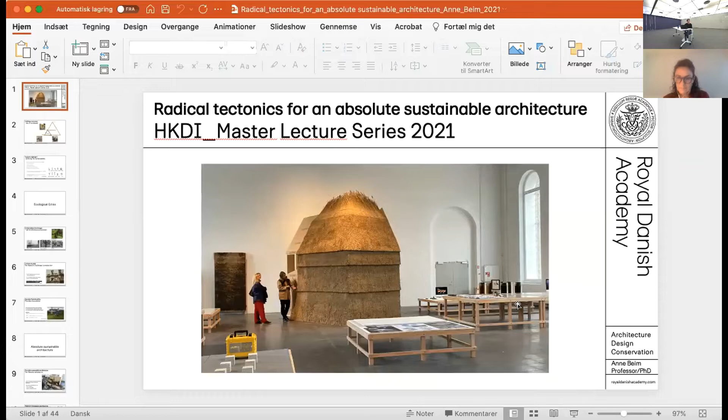But I understand that I'm now going to share my screen. Can you see it? Does it work? Yeah. Very good.

Well, what you see here is from an existing exhibition that is now running at our school. We have a large exhibition hall, and I'm going to return to this later in this lecture. I'm going to speak about what we in our center have been working on for some time, what we call radical tectonics within the framework of absolute sustainability. It seems a little bit extreme in many ways, but actually it's just a way to try to get into the core issues of both tectonics and the aspects of sustainability. And I'll try to unfold this now in this lecture.

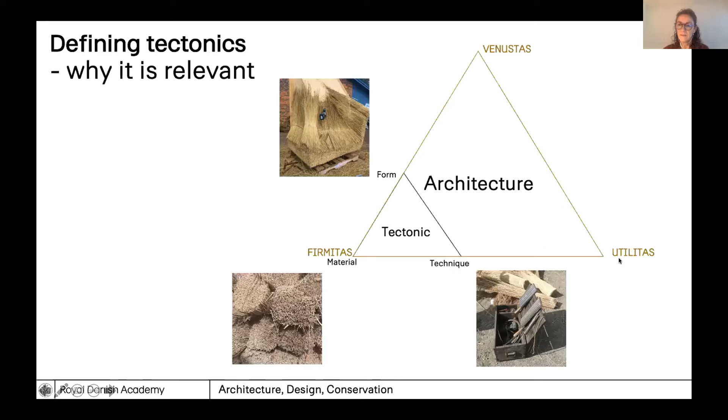But for those of you who are not totally acquainted with the concept of tectonics, I'll just briefly introduce it to you, and you will probably see throughout the lecture why it's relevant. As you may know, the ancient theorist Vitruvius, who wrote the Ten Books of Architecture, one of the first theorists in architecture, defined the three concepts. I have a problem with my local screen here. Anyhow, venustas, utilitas, and firmitas, that is the beauty, the utility or the functionality of buildings, and then the firmness or the technology of the building.

And as such, tectonics is sort of a subcategory of architecture in the larger context. In that sense, we can define it as a smaller triangle that is concerned with the form, the technique, and the materials of which architecture is made. And of course, it taps into the larger aspects of beauty and the use of the building. So in that sense, it's all connected.

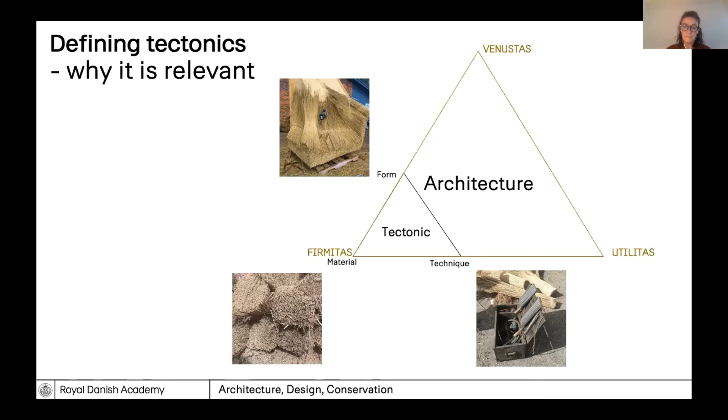Why is this now? One of our colleagues had dug deeper into this concept of tectonics and defined what we now call the tectonic alphabet, which is the different ways by which you can actually work within the tectonic realm. And that is directly connected to building technology, which means the way that the different construction elements or the material connections are related.

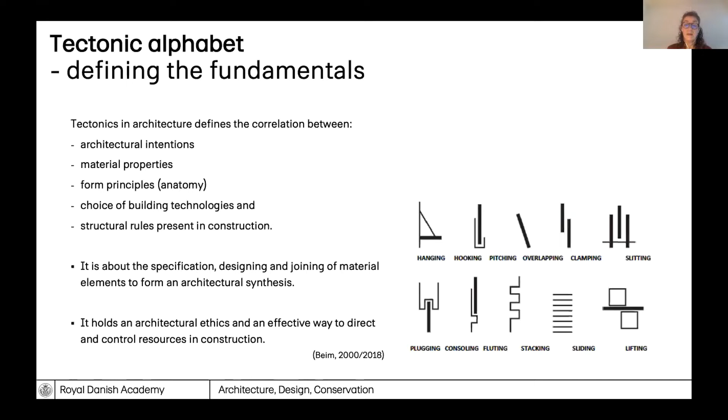So altogether, it's about the specification and designing and joining of materials and the elements to form an architectural synthesis. And in that way, as is said here, it holds an architectural ethics and an effective way to direct and control resources in construction.

However, we are now looking into, at least from what we talk about here in Europe at the moment, the COP, a global issue; we have COP 26 going on right now in Glasgow, and we have different statements coming out from the meetings that it's very serious, and we now at a global level have to find solutions to the present problems, which you could define as an ecological crisis. It's not only a climate crisis, it's an ecological crisis at a larger scale. It also relates to the question of biodiversity, or lack of biodiversity, resource scarcity, and of course the climate crisis we now see in different ways across the globe.

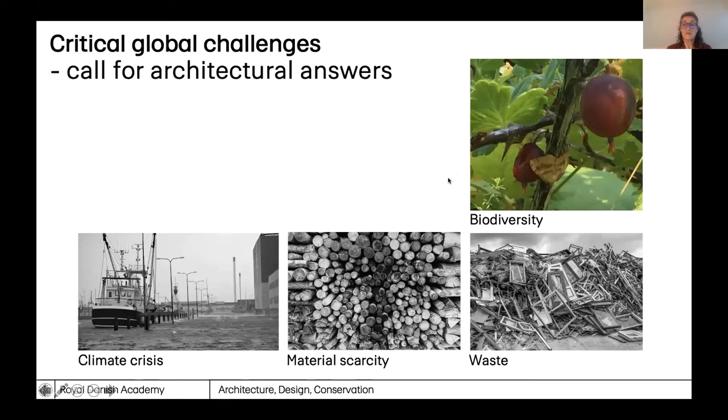And finally, we have problems with waste. Waste from the construction industry is actually a very big problem, but waste at all levels; in particular, we also see the problem of plastic waste. However, these overall questions also call for architectural answers. And why is that? In particular, in the building and construction industry, we have a great responsibility to take part in this discussion and find solutions for societies.

And if we look into the numbers, we are responsible at this moment for 35% of the total energy consumption, and we're also responsible for 40% of the greenhouse gas emissions. Not least, 40% of the total material consumption. And in the EU, the total waste is between 30 and 36%.

At the political level, at least in Denmark, our government has decided that by 2030 we are going to have a reduction of 70% of greenhouse gas emissions. However, that's just following EU politics, in that by 2050 we have to have a 100% reduction, and these are reductions in regard to the emissions we had in 1990.

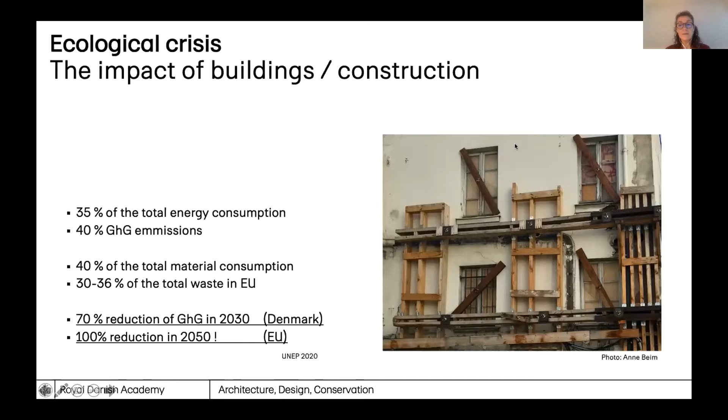When we speak about absolute sustainability, that's part of a larger discussion in terms of the planetary boundaries. This is a research field that has been defined by the Stockholm Institute and one of the main researchers, Rockström, who has defined these different planetary boundaries from 9 primary aspects, also tapping into the critical aspects I was just mentioning, such as biodiversity or pollution of the oceans, the air, and so forth.

However, other researchers have looked into similar aspects for the construction industry. What does it mean when we have to build in terms of absolute environmental sustainability? They looked into single family houses in Denmark. If we have to fulfill these very strict requirements, it will mean that we have to reduce 89% of the harmful environmental effects of construction, 80% of the greenhouse gas emissions from energy consumption, and not least, reduce the living space per person by 60%, which are severe numbers in regard to how we live today.

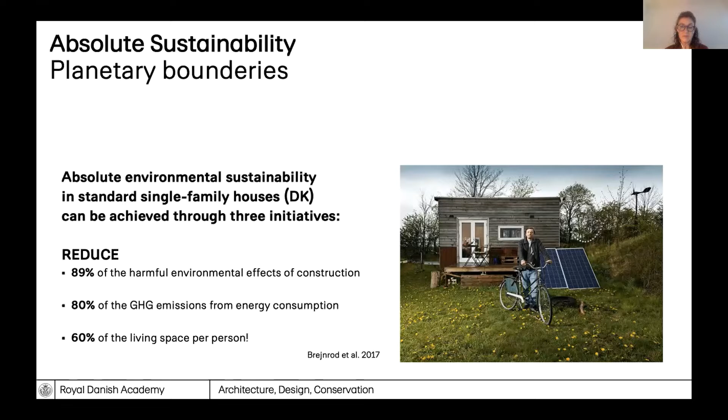So then, of course, that raises the question: are we going to have less living quality, or by which means do we have to reach into these very reduced ways of looking into how we build today and how we're going to build in the future?

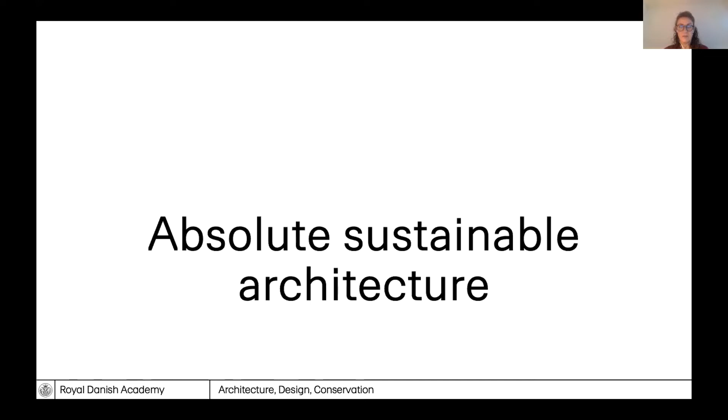So what does this mean when we dig deeper into that question of absolute sustainable architecture? By which means can we build? What sort of architecture do we look into? And from the tectonic aspect, or you could say the material perspective, what sort of materials can we apply?

So we asked ourselves in the research center this question, and we also looked into it from a life cycle perspective, which means that we asked the question, how can we design architecture and build according to absolute sustainable principles? And what would the consequences be for the use of materials, the building techniques, and the tectonics and architecture?

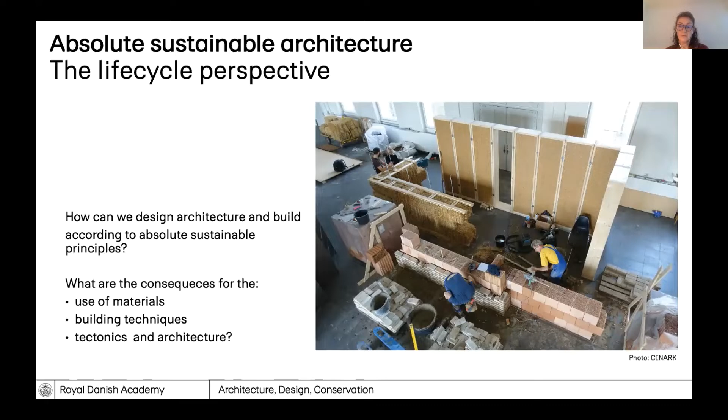Looking into these very severe numbers of reduction, we very quickly realized that it actually left very few materials for us to apply. And we ended up with three main structural materials. That would be straw, wood, and clay.

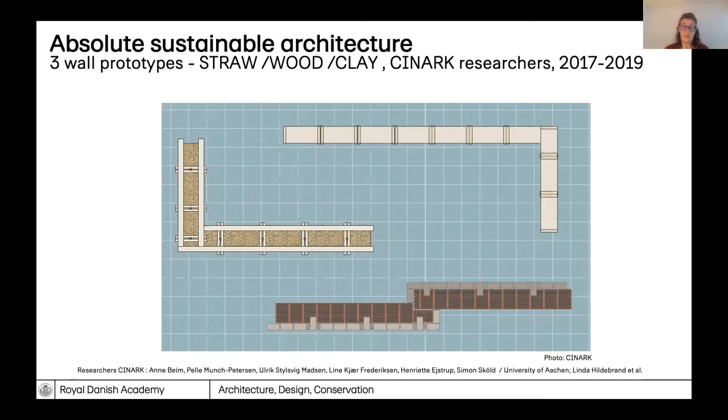However, being the Centre for Industrialised Architecture and having dealt with high-end industrialized analysis and research projects previous to this project, we also knew that we wanted to combine these, you could say, simple materials with high-end industrialized thinking. So we wanted to apply these materials according to the present legislation, and also to the present industrial manufacturing systems and thinking.

But before that, we actually sat down and wrote a manifesto for what we called circular construction within the paradigm of absolute sustainable architecture. It's much longer than this, but I just took the short version: we had to minimize the amount of materials and the number of different materials in the structure. We wanted to use uncontaminated, non-toxic materials that should not be additionally treated. We also wanted to use construction joints or assembly that could be disassembled. And we had to reduce the waste in production.

What does this then mean? It means that we have to leave out materials that demand a great amount of non-renewable energy in the production and/or had severe negative environmental impact. And that is mainly materials made from raw oil and synthetic materials. All together because we had to reduce the damaging effects on the health of humans, animals, and nature per se.

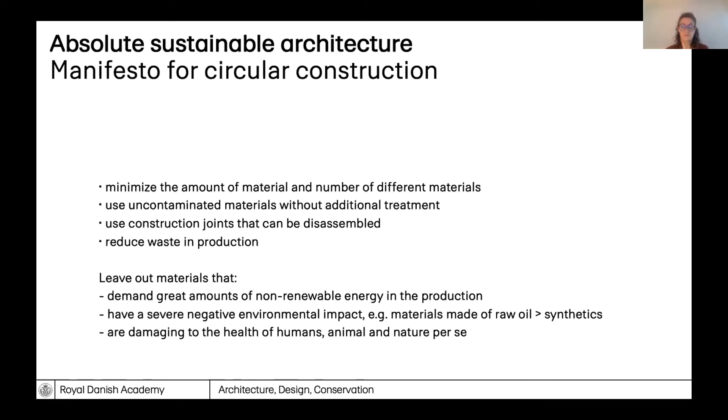In order to get deeper into this, we developed what we call the construction material pyramid, which in this first version is a small diagrammatic system, you could say, that organizes the different materials according to their CO2 emissions.

For this, we could select materials, but also omit materials, as we wanted to lower the emissions. So our primary take on this was actually, you could say, a very narrow focus on the CO2 emissions, at least from the beginning. But that was just a way, a design strategy, in order to get deep into the question of the absolute sustainable solutions.

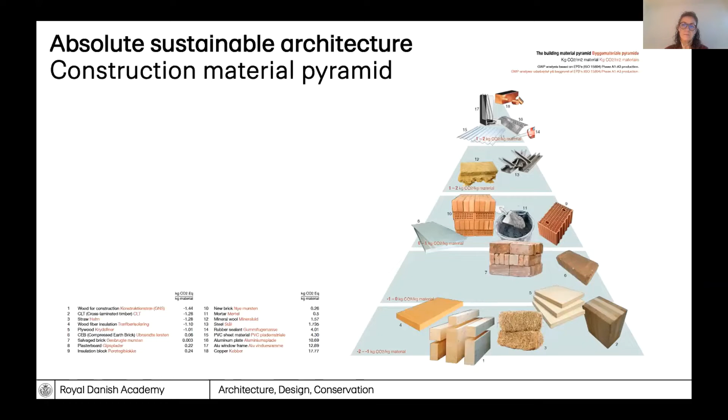So what did we do then? We developed or discussed these strategies for radical tectonics, in which we wanted to use these pure materials. And as I mentioned, we also wanted the dimensions of the different construction elements dictated by industrial standards. And we wanted to have the least possible degree of processing of the materials and components, which meant we wanted to use the raw materials themselves or the components directly coming from industry.

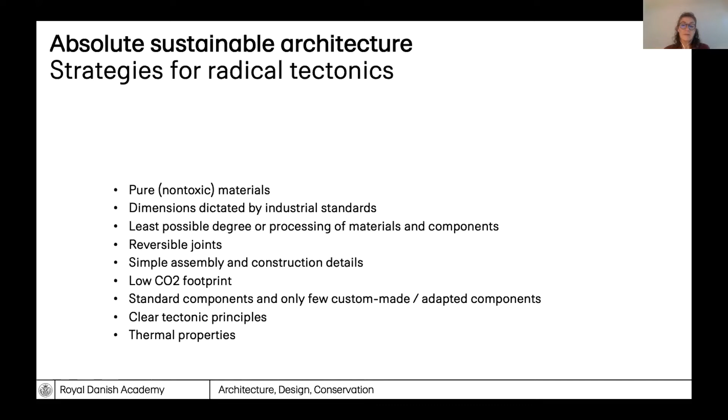And then we had to consider these reversible joints, the way we wanted to construct the various wall elements. So it should be very simple assembly and simple construction details. And then, of course, it was all about this very low CO2 footprint. So, as mentioned, we use these standard components and very few custom-made adapted components or joints. And this was all made from very clear and simple tectonic principles, which were defined in the very beginning.

So what did these radical tectonic experiments turn out to become? We focused on three different material groups, and the first one was wood in this case. So we wanted to make this wood prototype prefab module, based on an industrialized concept. We made it by hand on site in our workshops at our school.

But we tried to apply the procedures and the dimensions of the different elements given by the industry. So there were actually very, very few craft-based procedures. And this could easily be done in a factory or a manufacturing plant.

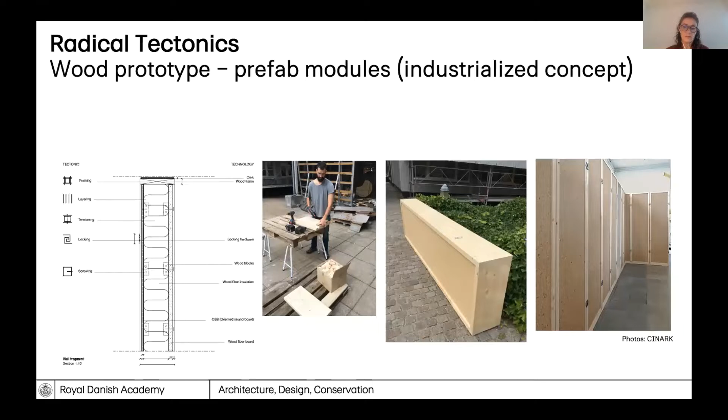What was important was that these elements were joined with this sort of lock that could be locked and unlocked. And what we see between the elements is a cork plate that makes the joint sort of tight and flexible.

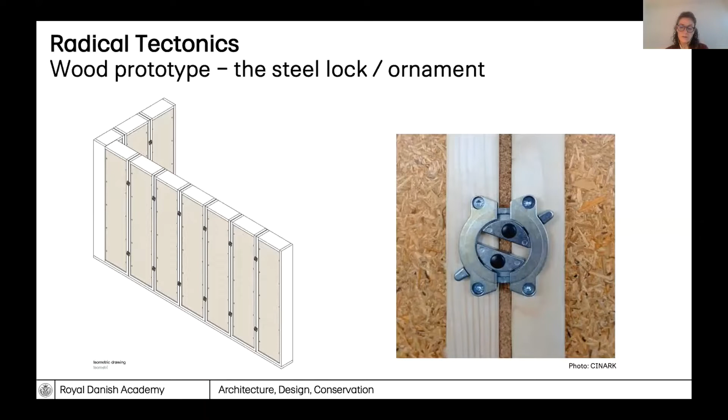So what we're investigating here is actually mimicking the sort of industrialized products or elements, and at the same time pushing the boundaries of this thinking in terms of easy assembly. These elements could be carried by one or two persons and could be put up in a very short amount of time. So we used all the different dimensions of industrialized benefits combined with easy craft procedures.

As for the second structure, that was a combination of unburned clay bricks combined with reused bricks, and for this we built it as a homogeneous wall structure combined with burned tile blocks. This is a very common structural material, particularly in Germany and the larger part of Europe.

It has not been fully implemented in Denmark yet due to our very long tradition of using regular masonry blocks and bricks. However, it's a very highly efficient structural element, and it also has insulating properties. It's easy to build with, and it's also fairly cheap. So it's a highly industrialized product, and we wanted to combine this with virgin materials such as unburned clay, and then the reused bricks.

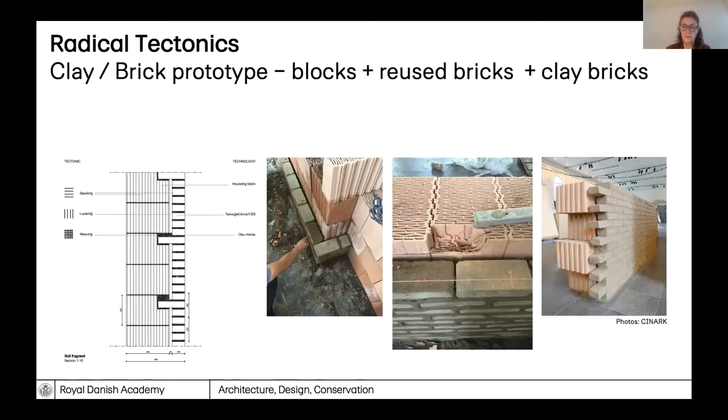So it was a matter of how to combine these various elements in order to also benefit from the different material properties, where the unburned brick was on the inside wall and the reused brick was on the outside. So we came up with what we call a masonry hinge that makes it structurally efficient, and also combines the wall in different ways.

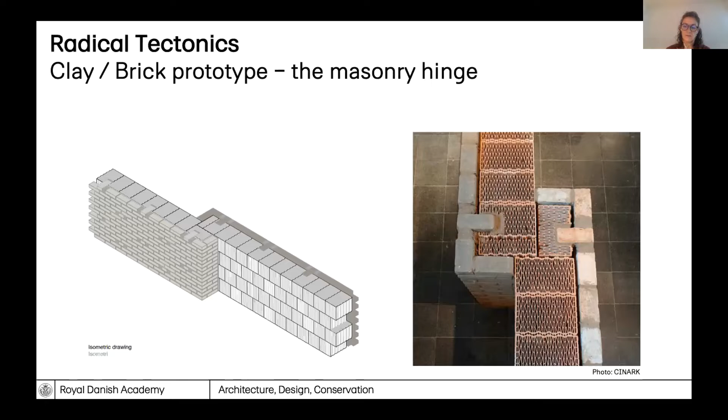Then the last system was applied using straw bales. And actually, while we have been working on this project, which is already a couple of years old, there has now been developed a fully industrialized product called EcoCocoon that is similar to this, a structural element that, similar to our wooden wall, can be built in different sections, but also come as full wall elements. That's a fully industrialized product by now.

So the development in the construction industry is actually speeding up these years. So what we did at our school at this time was actually just the early steps towards an idea of industrializing this sort of construction materials.

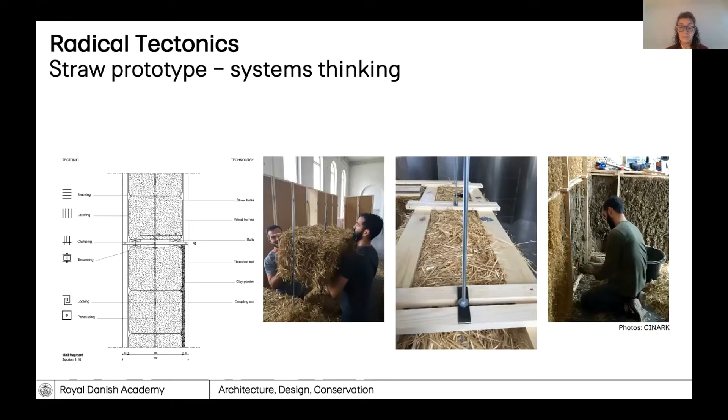And the straw bale, of course, is a very simple waste product from agricultural production, and this is applied together with a wooden frame and steel rods for strengthening the structure. However, it was this open framework that was later cladded with clay plaster, and that is primarily the question of fire protection, which has been an ongoing issue, particularly with the biogenic materials.

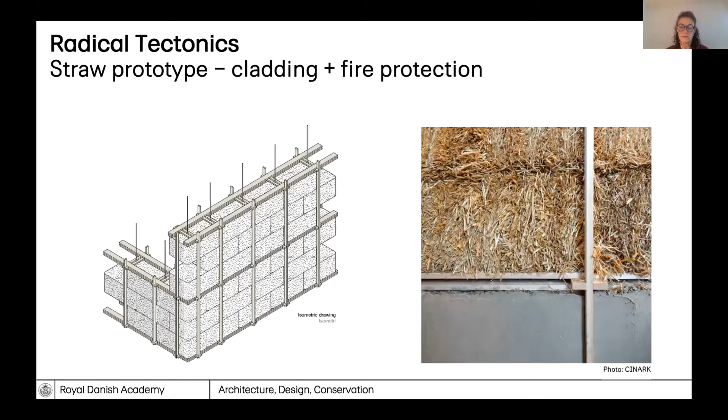So just to wrap up, for these three initial tests or experiments with what we call radical tectonics within the absolute sustainable framework, we wanted to particularly emphasize the question of what we call reversible joints, what we envision as tectonic motifs or ornaments. That also makes it easier to facilitate maintenance, and it's also a more effortless reuse and recycling.

But what is very important is that it separates the life cycle of the building from the life cycle of the materials, which means that you can actually just take out certain parts, but the core structural elements can be replaced depending on when they need to be changed by new materials or altered due to functional aspects.

But altogether, it's also about this ethical awareness when we choose the materials and how it taps into a larger cultural understanding of how we built in various parts of the world. And you could say these three experiments are developed on the shoulders of a deep understanding of the building culture, also within a Danish context, and how it can be developed into industrialized thinking and products.

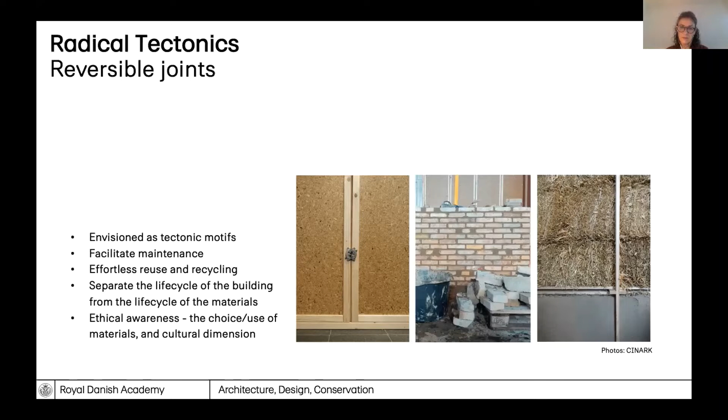So, just very briefly, a quick presentation of the analysis we did on top of these experiments. As you see here, we have the different material spreads, which means that in the different structures we have prioritized the materials very strictly in order to get these very low emissions.

And of course, the one we see in the center is a critical one, because we have the insulating clay block, or brick, that has of course high emissions due to the manufacturing premises.

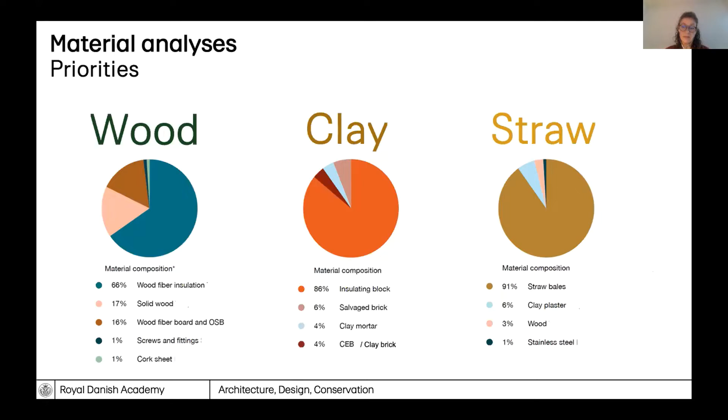It also shows that in the straw diagram we have the straw bales as the main material, and in the wooden one we have the wood fiber insulation, which is not a structural material but the insulating material. So altogether, if we look across the three material types, we see that the insulating aspect is a very central dimension as for the amount of material that is applied.

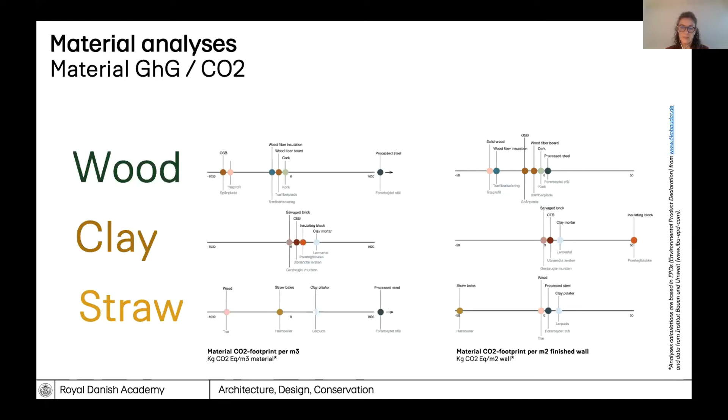So what's interesting when we look at these diagrams is that the different materials move up and down depending on how much material we're actually using in the various structures. So that is very important when we look into these aspects of the CO2 emissions and the impact.

And as for life cycle analysis, we made a very overall estimation of how, within the various time lapses, the different materials either could be replaced or would get into either a technological circular reuse, or a more nature-based or biological circular system.

And when we look at the center one for the clay structure, it of course has a very long-term perspective as for the materials, whereas the straw and the wood have much shorter cycles. However, they are also based on biogenic materials that much more easily can get into the biological

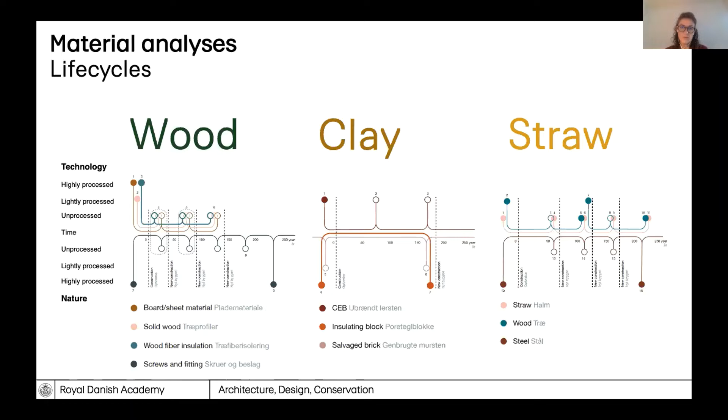ecological systems. So in that sense, these diagrams and these analyses have to be looked at very critically and also studied in detail in order to understand that it has very different impact depending on what sort of material and what sort of biological, ecological cycles they are part of.

And finally, when we look into the overall global warming potential for the three structures, the brick wall, of course, had high emissions, whereas the other two walls had low emissions.

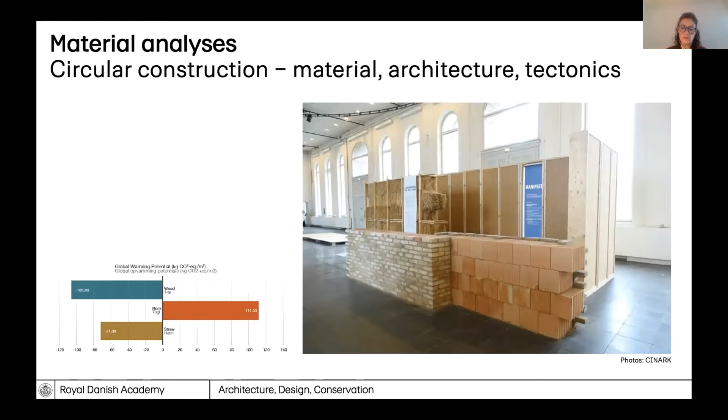And these structures, as you see in here, are just early indications of what sorts of materials, what sort of structures, and what sorts of tectonic strategies we can apply when we look into future use of materials, when we have to get into these high reductions of the CO2 emissions.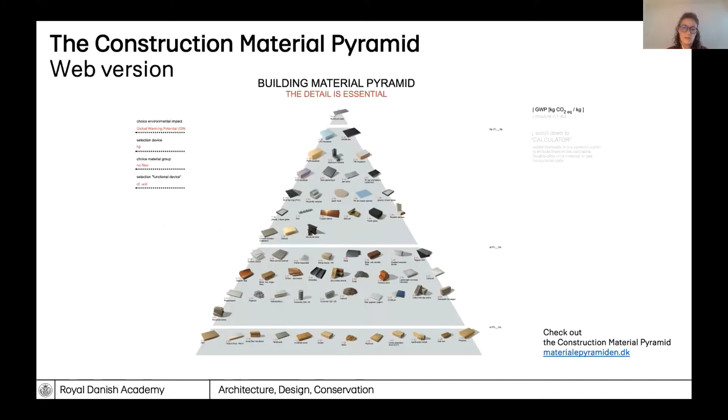However, on the shoulders of all this work, we kept on developing what we call the construction material pyramid, which has now become a digital tool. And I can share the website with you after this, or send it to your teachers. It works in a similar way as the early edition of the pyramid. You can choose the different materials and you can make your own little pyramid.

You just click on the various materials and you can define in the small calculator at the bottom the amount, the kilos or the square meters, and you can also filter on the menu to the left if it's cubic meter or kilos, or what sorts of materials, if you're looking into insulating materials and so forth.

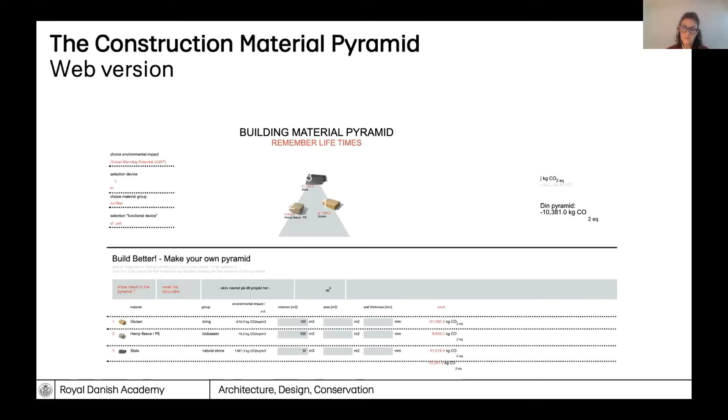So this has now become a very effective tool and has been spread out, at least amongst the educations within architecture, engineering, and construction in Denmark, and it is now also being applied in Holland. So what we started out just 4 years ago has now become a new way of talking about materials in a much more critical but also observant approach to the use of materials. So how do we then continue researching into these radical tectonics?

We have then, on you could say the second step in regard of this, looked into the biogene materials and how we can enforce or enhance the use of biogene materials in structures. And we have now looked into facades, what we call with CO2 neutral fireproofing. And these facades are thatched facades, and the fireproofing is clay.

And this project we're doing together with the Danish Fire and Security Institute and two thatchers and a small entrepreneur that is working with clay in different sorts of structural combinations.

What we see here is that if we look back into history, certain roof structures in Denmark have been applying clay as the top, the finishing of the roof, where the clay sort of runs down over the surface, and in that sense improves or covers the surface so that it cannot burn that easily.

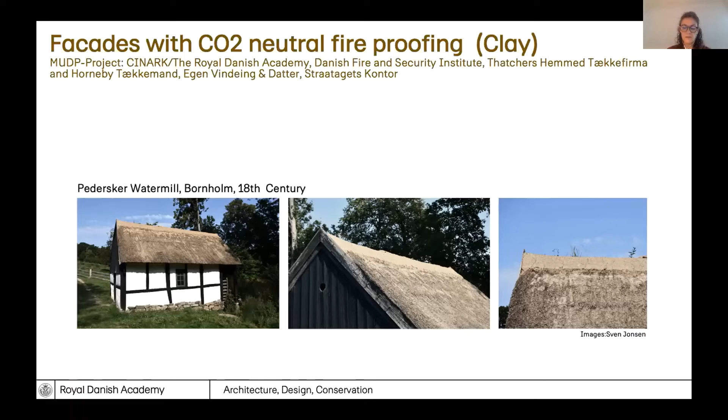But this project is both looking back into history and investigating what sort of historical experience and knowledge can we draw on, and how can we actually translate that into contemporary or present day construction industry.

So we have been looking into these thatched facades in that sense that we wanted to apply different sorts of clay materials and lime in combination to impregnate the different surfaces in order to test and select the best performing structural combination.

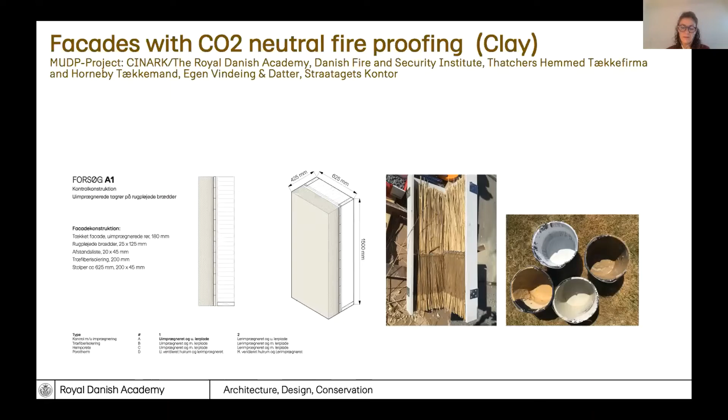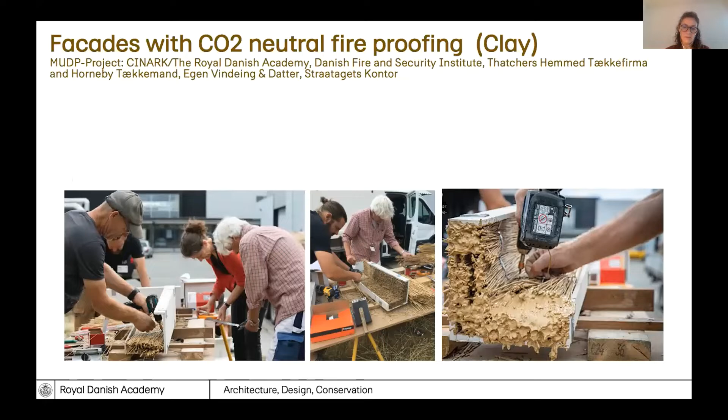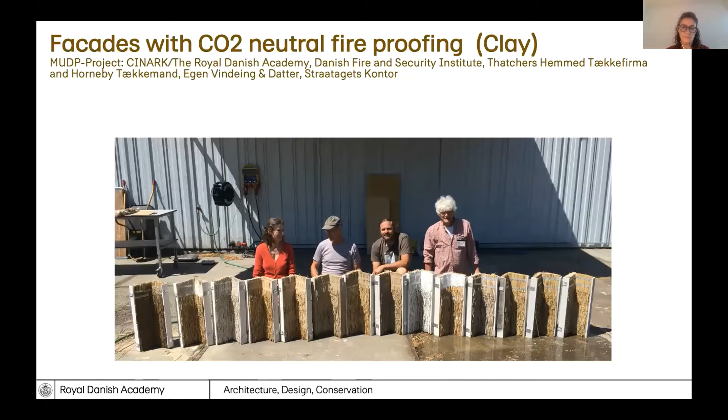And this is done in the Institute of Fire and Security, using also their laboratory equipment and their test facilities. We started out with these 14 different combinations of materials and the way they're applied on the structural elements. And they were tested in the standard procedures.

These 14 tests had very different performance. But you have to pay attention to number 4 from the left, and the final one and the third final one on the right. Those 3 were the ones that performed very well, having clay put on the surface or in between the straws themselves.

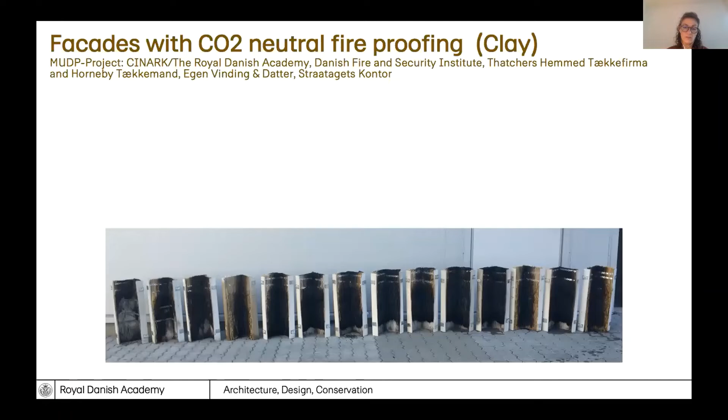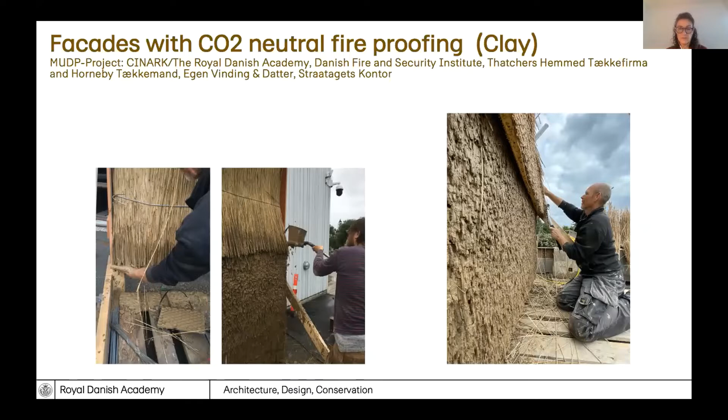On the basis of this, we then selected these particular ways of applying the clay and the thatched surface together, and we made larger elements that were going to be tested for their performance. We now have these 3 elements standing to the right. The far left one is without any clay impregnation, so that's the baseline on which we test the other 2.

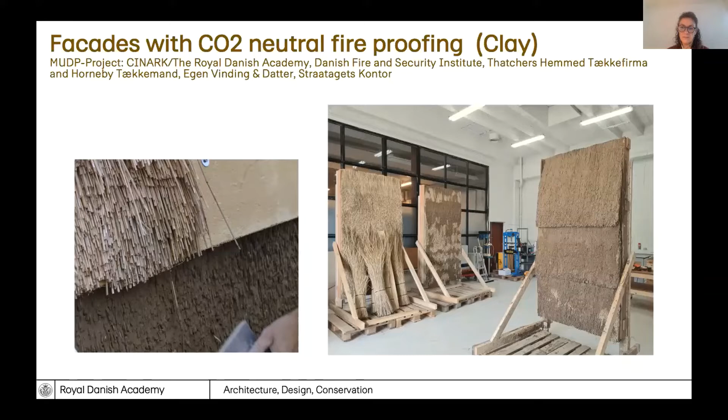The one you see to the very right has these clay plates in between. It makes what we call a fire stop, which makes the fire run over the surface in a different pattern that also hinders the fire development. They were tested for about half an hour, and they performed extremely well, similar to highly efficient materials that they usually compare with.

So what we wanted to do as part of this project was also to present it as a surface or a cladding technique added on to this high performance, low emission construction, such as the straw bale wall.

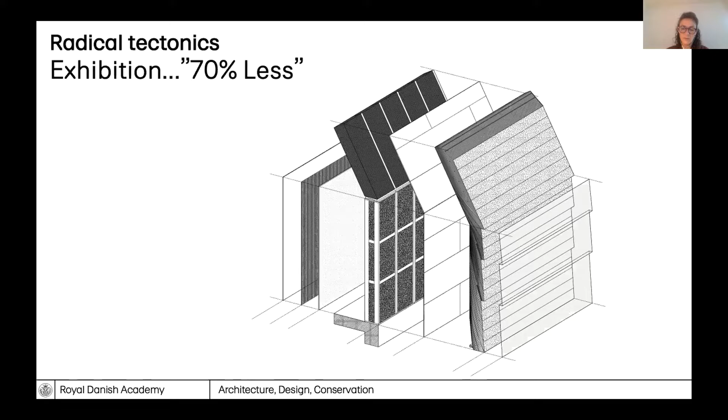So we built this structure that presents the combination of the initial research with this second step, where we want to develop cladding or facade surfaces that can be added to these sort of structures. This is now sitting in our exhibition hall, and it's exhibited until the 4th of February. And we now have a lot of different responses to it.

And it happens that the authorities taking care of our listed buildings in Denmark are very interested in this research, because they want recommendations for listed buildings, so that when they change the construction for various reasons, they can do it with materials and procedures similar to how they were built originally, and not add contemporary synthetic materials into these old structures.

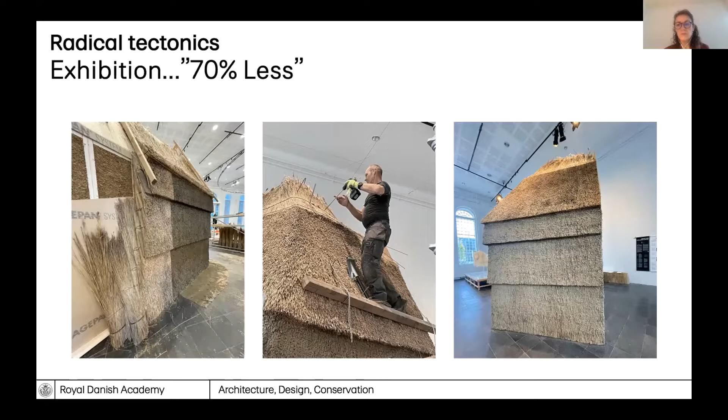So this project already has had, or will have, an impact, at least on older buildings, but we also hope this can have an effect on present day structures. We also put this structure into our construction material pyramid and compared it with a regular one family housing structure, as 80% of the Danish housing industry is single family housing.

And what we see here to the left is a structure made of light concrete in the interior wall, and in mineral insulation, and then bricks on the front. And on the one to the right, we see the prefabricated straw element in the interior with a thatched surface or cladding. And very obviously, the two pyramids or the two structures are performing very, very differently, and we see that the structure to the left is a very high emission structure, and the materials there are not.

If we look into the 70% less perspective, it's not the way to go, and we have to sort of push ourselves towards the way of thinking and the material catalog as we see to the right.

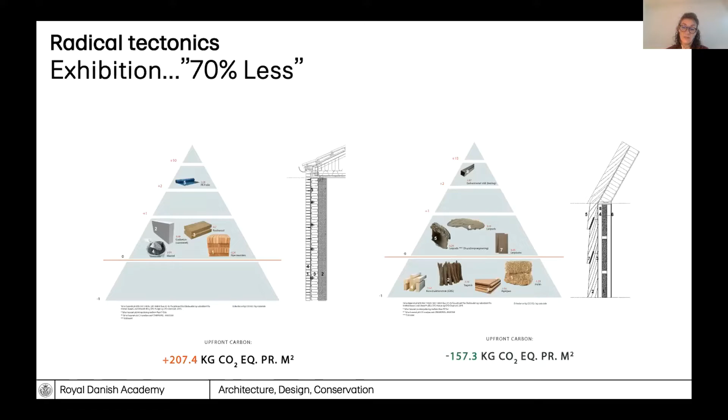So just to wrap up, where to get started when we look into the radical tectonics for absolute sustainable architecture, we could say it's all about ecologies. All these things, all these materials, the way we construct, the way we think is connected. So it's also an ethical understanding of material resources. Where do we get them from? Where do we harvest them? Are they local? Are they transported from afar?

And how do we actually also share or apply these various resources in ways that are responsible in terms of, you could say, our CO2 footprint, but also our environmental issues. So it's about, you could also say, choosing an overall strategy, and I can recommend you to write an ambitious architectural manifesto. At least it helped us in the very beginning.

And then, of course, it's a matter of defining the principles to specify the design rules and fabrication methods in this case, but in particular the design rules that are sort of forming the basis for this new way of thinking to come forth.

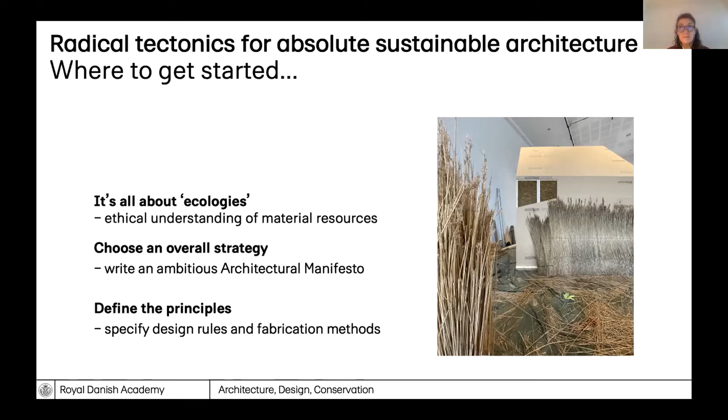Obviously, this day and age, we're all dealing with global climate issues, and to be so insightful with your research and innovation in the tectonic systems and construction methods, I think we can all learn and maybe kickstart these kinds of conversations everywhere globally, and see what we can do to improve our built environment and our cities. So we'll come back to you later when we open the floor for the panel discussion. But for now, we'll shift this discussion about architecture for the future to a city scale.

So next we have Professor John Doyle from RMIT to present his lecture about Super Tight. Dr. Doyle is a registered architect, also the head of Master of Architecture at RMIT. He's been working on a lot of projects in Australia and abroad in detailed design, delivering award-winning projects around the world. He's a founding partner of NAU and was a project architect for Lab Architecture Studio and Toyo Ito Associates, where he worked on the delivery of highly complex international commercial projects.

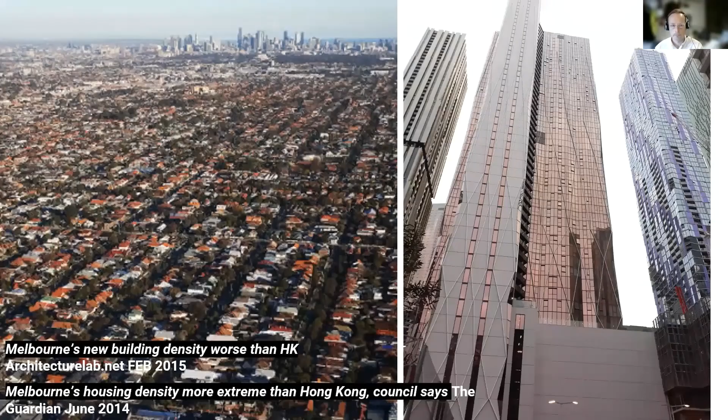So this concept of density is obviously highly politicized, fraught and culturally specific. In some cases, density has reached an extreme that is problematic and benefits a very small group of people over the many, most notably the subdivided apartments of Hong Kong. But for much of the world, the question of density goes to the other point, and density becomes a battleground of ideas in terms of how we tighten up and how we implement density where there is none.

So the context that I'm coming from here in Melbourne is one of the most loosely, or undensely, settled cities in the world. Melbourne does have pockets of comparatively high density, particularly in the city and in the suburbs, but the majority of its city and many cities in Australia and North America are incredibly low density in terms of their settlement. So this project is in part directed into this space, trying to learn and create strategies for how cities as a whole can be more closely settled.

So the questions we ask are, how do we create good density? What is good density? How do we change the narrative around density? And how do we make density desirable? So as I said before, tightness is not density. Tightness is not size. It's about the relationship between things.

We worked on this project with Yoshi Tsukamoto from Atelier Bow Wow, and one of the ways he described it was that tightness could be analogous to how we might have a tight relationship with a person, or as an architect, a tight relationship with a skillful contractor or a carpenter. And cities and buildings are the same. In order for a building or a city to be tight, it needs to make the best use of the resources available to it, and waste nothing.

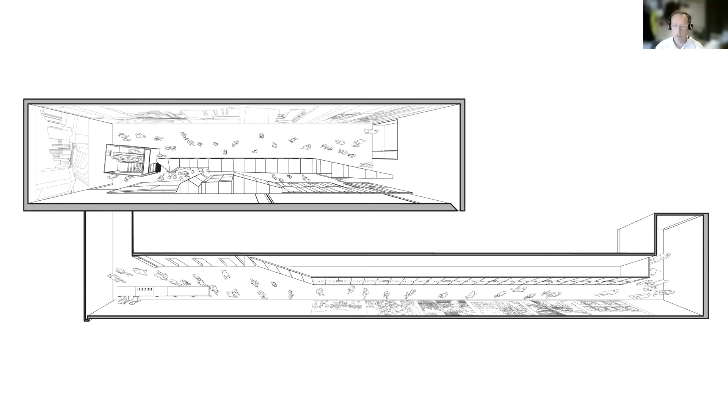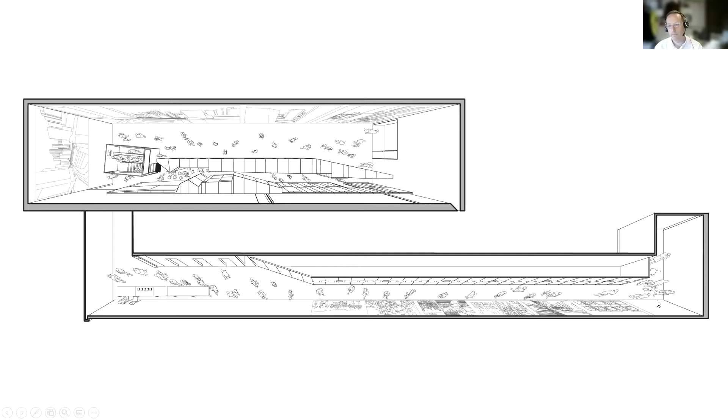And so the exhibition was made up of a series of parts. I don't know if you can see my cursor, but in the main gallery, we had what we called the Tight Cinema, which was a series of large-scale projections, a very small bar that we called the Tight Bar, the Tight Hem, which was a laneway that ran along one side of the main space, and the Tight Laneway, or the Tight Gallery, which was in a secondary space to the side.

So the Tight Cinema, as you can see here, was a huge series of projections of work contributed by architects, designers, and artists and sort of thinkers from throughout Asia. So we had video and still work contributed from Japan, Korea, China, a number of contributions from Hong Kong, from Vietnam, Singapore, and Malaysia. And all of these films considered the occupation and kind of design of cities in different ways.

The Tight Hem, hem is a Vietnamese word which means effectively laneway, or a type of laneway, which became a sort of secondary gallery space and event programmed space, exhibition space. The Tight Bar, which was a kind of miniaturized lecture theatre and kind of discussion space, and this is Tight Laneway.

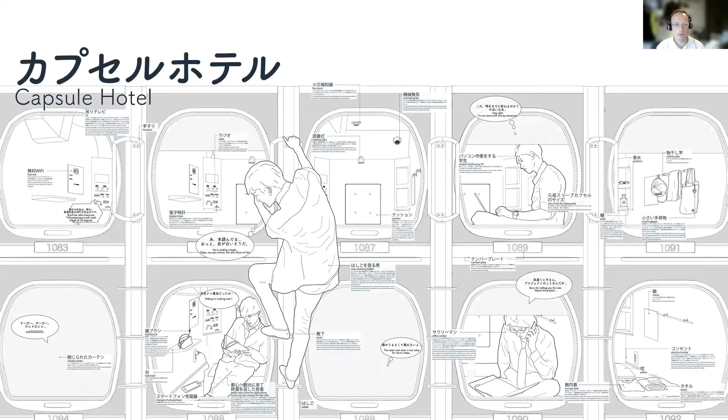So the Tight Laneway Tight Gallery played host to a series of 1:1 large-scale drawings depicting scenes of, I guess, tight inhabitation in Tokyo. They were produced by the Taishin Shiozaki Laboratory from Tokyo Institute of Technology. So one of the key ideas of this exhibition, as I said earlier, was exploring the concept of the 1:1.

So it's one thing to discuss density through sort of numerical measures or kind of economic models, which is often how planners and economists discuss the design of cities. But as architects, we wanted to understand what the consequences of density and therefore tightness are at the scale of human experience. And so I guess the contention behind this is to understand the tight city, you have to be within it in some ways.

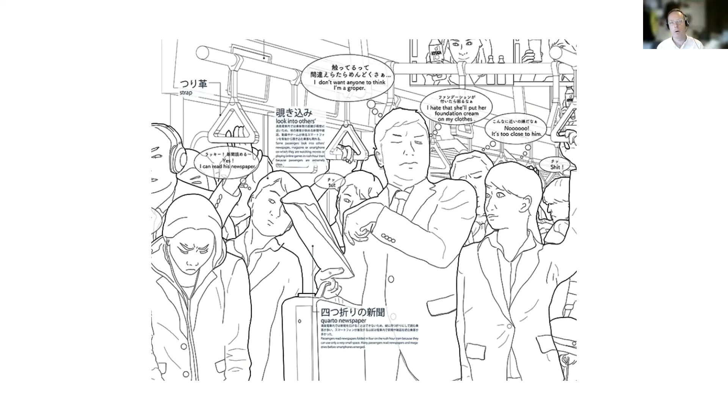And so everything we did in this exhibition, from the development of these installations to the projection of drawings and film on the wall, was about giving a larger than life, or as large as life experience of this. So the drawings that were hung in the tight gallery were effectively drawn at 1:1, and the installations that we built were really directly modeled from observations and experiences that we've had living in different cities throughout the region.

So the tight hem, which occupied the main gallery, was modeled very directly as a kind of study on an actual laneway in I think District 1 in Ho Chi Minh City in Vietnam. And so what we did in order to transpose this bit of urban fabric that we identified as being interesting, was to undertake a process of abstraction and remodeling.

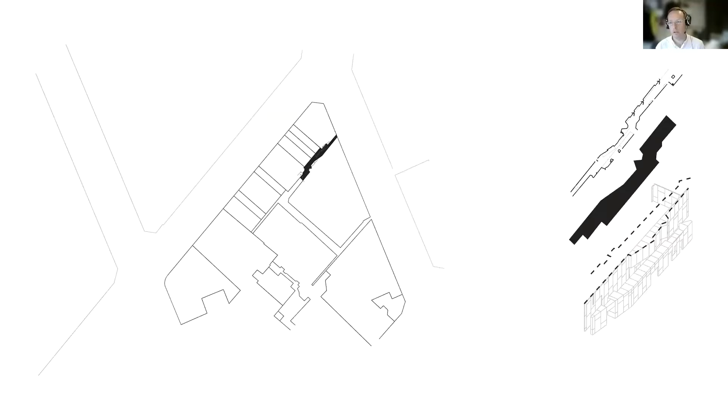The intention of this was that we didn't want to just relocate or represent this space into the gallery as a very particular singular one-off space in a city from another part of the world, but rather to abstract its dimensional qualities, its spatial organization, its tectonics to a degree, so that there was something transferable and learnable and could potentially be applied to other spaces in future cities or future architectures.

And so we initially modeled this space very, very directly, applying all of the furniture, downpipes, windows, doors, and everything like that. And then after that undertook a process of abstraction in which we stripped this back to a very abstract sense of the spatiality, the proportion, and the extents of the existing, being the key factors which influence its potential performance. And I'll come back to that in a second.

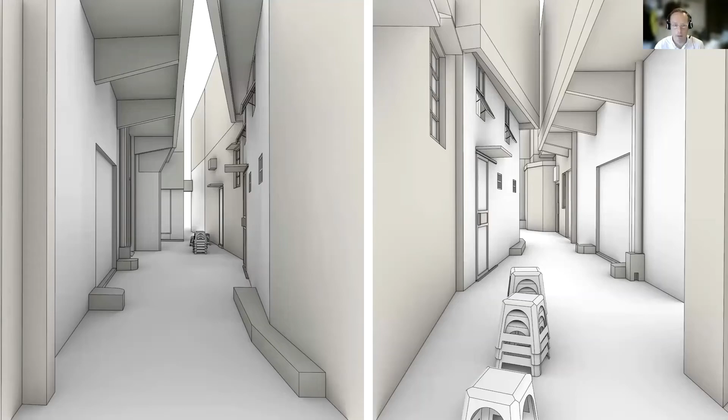The tight bar was modeled directly, again, from a bar that is very well known in Tokyo, which is also called the tight bar, and perhaps one of the key inspirations for the project as a whole. The tight bar is a bar in Shinjuku in Tokyo, which is famous, particularly for architects, as a place to come together and have debates and discussions. And I used to go there a lot when I was a student in Japan. And so again, there's a process of transposition and translation. What from the urban environment can we learn and what can we transfer?

Obviously, when we take a bar out of a particular context in a different city, we strip it away of all the kind of rules and regulations which perhaps governed it in the first place. So we had to remodel the stair so that it complied with Australian standards. It had to have a handrail, tactile indicators. In the context of the gallery, it couldn't have a top because the fire regulations say that the sprinklers from above have to spray into the galleries, into the bar space.

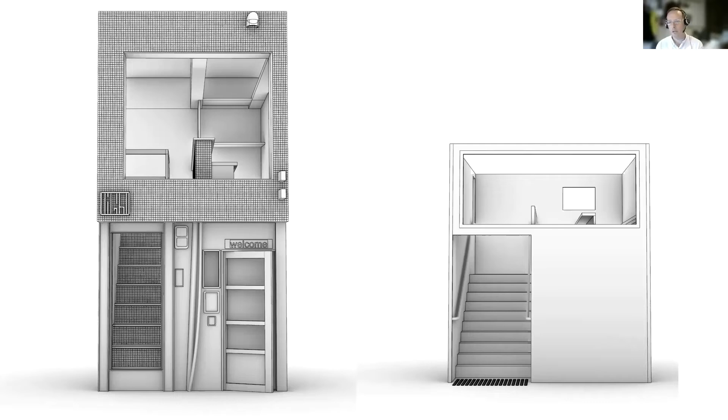But what it did do was create a very small space which had a limited capacity to hold people. And when those people were together, they were oriented around a bar, and a very particular sort of group dynamic could emerge. And so the second part of the exhibition as a research project was the process of performing these spaces, using these installations and bits of work and artworks which have been contributed as part of a participatory event in experimenting with the experience of tightness in the urban environment.

And so, the tight gallery was really only understandable as a space that you put the body up against. We tightened it so that the viewers would be almost within immediate contact of the very large drawings. You can't see them, they're blurry on the left. So that you understand the experience of density and experience of tightness in those cities at the scale of your own body. The tight bar became what we call the world's smallest lecture theatre.

So we invited a series of architects and thinkers and academics from around the world who happened to be coming through Melbourne, or we brought, to give talks and discussions in this bar, and the interesting thing about that is the discussions became incredibly intimate and very fluid, because there was only a small number of people that could fit into there. So anyone who came and could fit into the bar was welcome to participate.

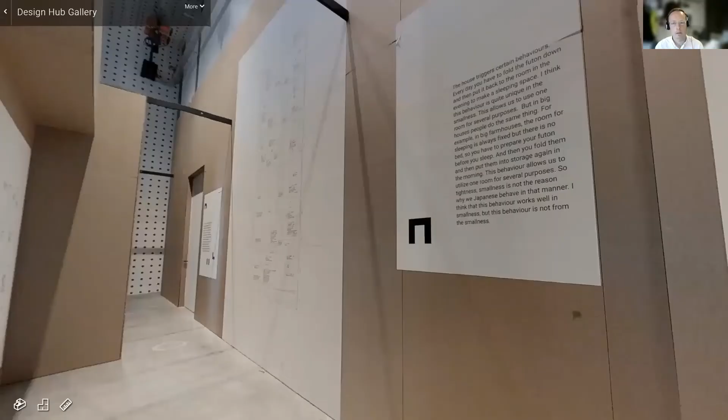The windows that orient onto the bar come from domestic or semi-commercial spaces, which often reuse or utilize the hem space as an overflow or auxiliary space for the activities of everyday life and commerce. We used the gallery, the hem, to hang some works by Atelier Bow Wow, not at 1:1, unfortunately, but I think 1:5 or 2, along with some comments on the exhibition from Yoshi.

We hosted a workshop by Drawing Architecture Studio from Beijing, who came down and used the gallery, the hem space, to create a mural, a huge drawing, unpacking and understanding the activity or the life of Melbourne. And so this live research project allowed us to develop 6 observations about the tight city. What I'll do is run through these observations quickly now, and then talk a little bit more at length about a new project that we're starting to work through that's come out of these observations.

So the first thing that we observed was that in order for a city to be tight, it must allow for overlapping and sharing, both at the architectural scale, but also at the urban scale. So one of the main contributions that Shiozaki Lab made through their drawings, in observing what perhaps the difference between density and tightness might be, is the idea that there is not a 1:1 relationship in terms of program or function and urban space in cities. That through time, cities allow for different activities to take place at different times and at different intensities.

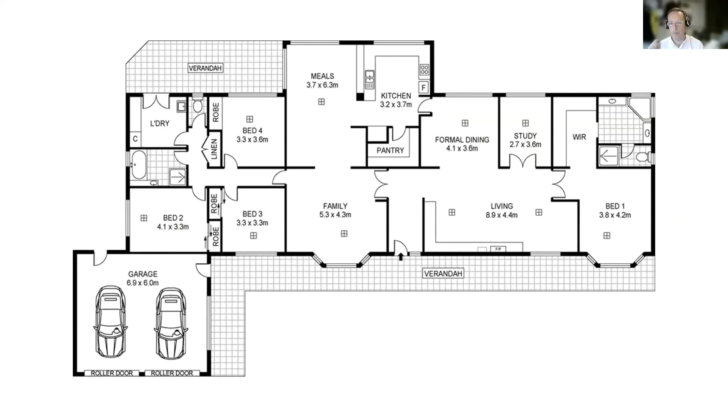And I guess the extension of this idea and the analysis as we sort of jump into architecture is like a move away or a critique of the 1:1 relationship between the planning of a building and a particular use. So we have to move towards a model whereby buildings also, as well as cities, allow for multiple uses to take place within the same footprint and within the same volume.

And the example we often cite of this is Atelier Bow Wow and Yoshi's office, which is kind of a hybridized work office and house. Atelier Bow Wow is a small practice, which allows these kind of functions to blur and reuse spaces variously depending on timescales across a very fluid section. And the reuse of footprints is a way for us to dramatically collapse the footprint of the city and perhaps tighten it up without necessarily having to go to the kinds of extreme levels of personal space loss that we described in some of those earlier images.

The second idea is the notion of what we call rasquachismo and adjustment. Rasquachismo is a Mexican-American expression that was introduced to us by Archie Pizzini, who is a Mexican-American architect currently practicing in Ho Chi Minh City in Vietnam. And rasquachismo describes the notion of a radical adjustment, or the ability to make do or remake your world using very basic elements ingeniously.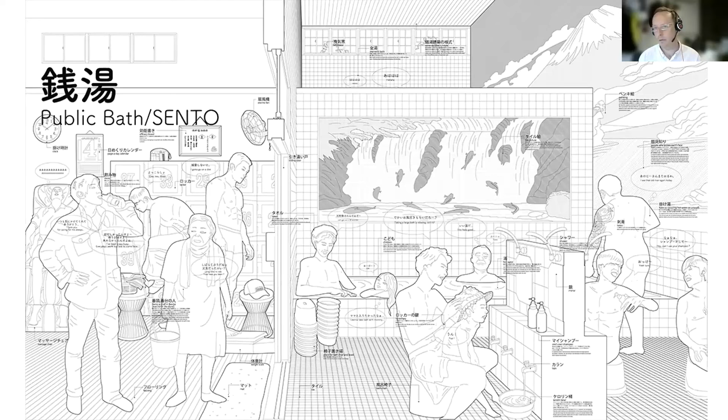And so, as we emerge from this COVID-19 pandemic, we think about these kinds of experiences in cities, experiences of closeness, of close exchange, and congestion, the culture of congestion, which is the basis on which cities have emerged. There are cultural practices associated with living tightly together and closely, which are to be valued and probably celebrated if we are to shrink the footprints of our cities.

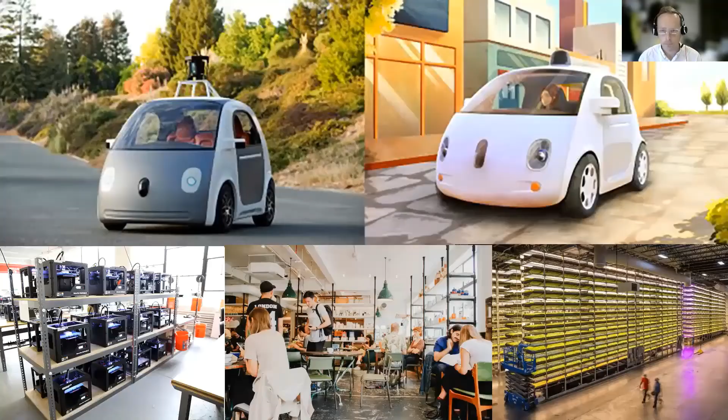There are many examples of incredibly dense cities which are also associated with high levels of livability. And so perhaps what we should task ourselves with as architects and urbanists is not necessarily the control of density or the limitation of it, but the creation of density, the facilitation of the types of densities that we would like to see, and the generation of the kinds of spaces that allow for that.

And so one of the things that we've been looking at is, in effect, the miniaturization of the city. How do we shrink down things like roads? How do we shrink down production spaces and bring them closer to us? How do we bring the aspects of working and office environments closer together so that the bits that are good remain, and the bits that we don't want get set aside or compressed?

We noticed that there was a relationship between the concept of tightness and culture. The socio-psychologist Michele Gelfand talks about tight and loose cultures in terms of sociology and psychology around the world. And we asked ourselves, do you need to be in a tight culture, in Gelfand's definition, to be able to generate a tight city? And can we live loose in a tight city?

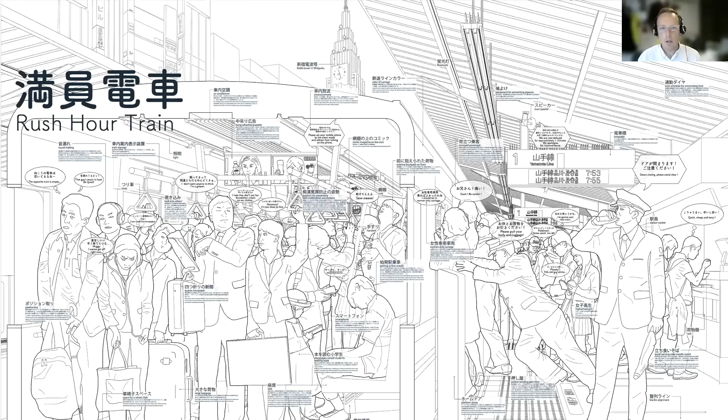And what we discovered, and the jury is sort of out on this one, is that there are examples of what Gelfand describes as extremely tight cultures, a tight culture being one which is very homogenous and adheres very closely to agreed social norms. An example of that might be Tokyo or Japan, where there's a high degree of ethnic homogeneity, but also a high capacity to tolerate density and to live closely together.

Counterintuitively, we might think of cities like Ho Chi Minh City, which has been described by Gelfand as having a very loose culture, a very high tolerance for difference and the breaking of rules, but at the same time incredibly dense with a high capacity to live closely together. So it's interesting that there is no indexical relationship between culture and city, but there are some places which seem to do it and some places that don't.

The last point that I wanted to touch on, and I'm running out of time, so I'll fly through it really quickly, is that in producing this exhibition, we had a lot of contributions from landscape architects and territorial thinkers who pointed out that we can't just look at cities and think about density and ignore the broader consequences of density. Cities don't stop at their borders in terms of their impact. And we live in a planetary network, which is totally interlinked.

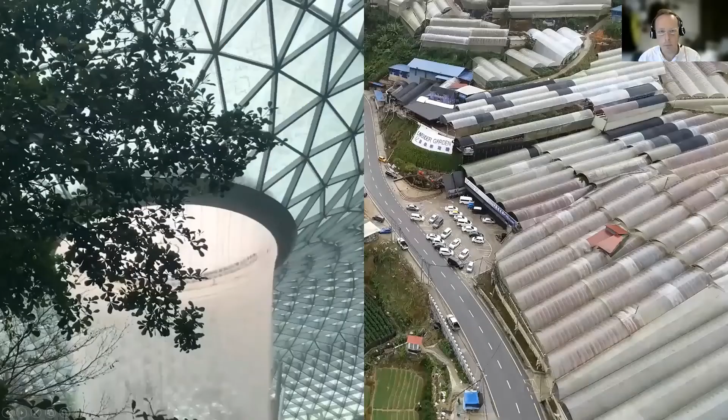An example of this that came up through the exhibition was Singapore. Singapore is one of the most dependent cities in the world in terms of its food supply. A huge percentage of the food and produce that Singapore consumes comes from the Johor Peninsula and across the straits in Malaysia. And one of the films that was contributed to the exhibition was by some landscape architects based in Australia and Singapore, and they cast into sharp relief the relationship between spaces of consumption, which you see on the left in Singapore, and the planetary hinterlands, specifically in Johor here, which support them.

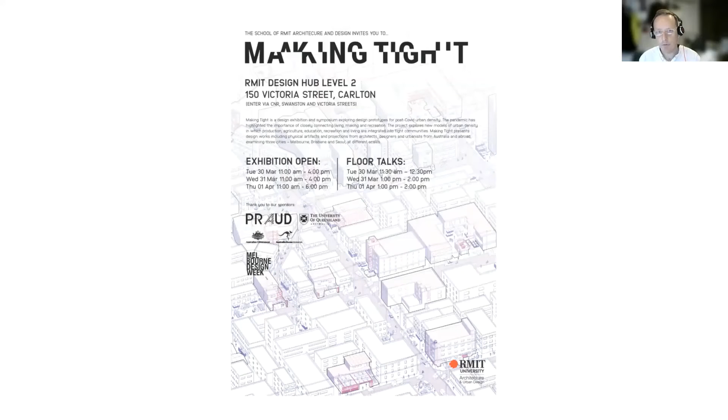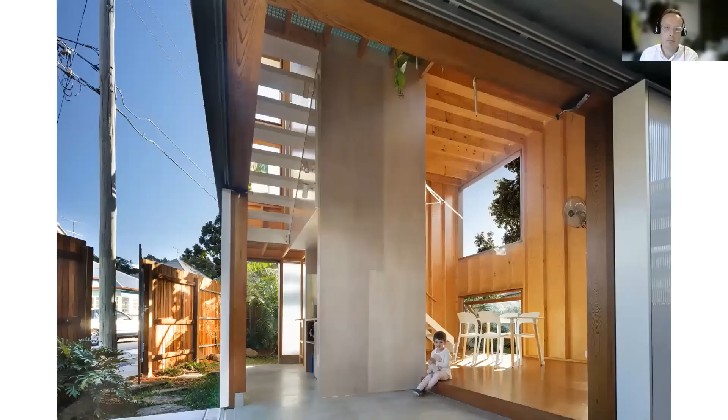And so this gave rise to a new project that we're currently working on called Making Tight, which is really looking at how we fold these spaces of production into densely planned, densely settled urban environments. And the idea that it's not enough to simply live closely, but we have to live and produce closely together. And so we put together a small exhibition on this. We collaborated with some architects from Brisbane who looked at how the domestic space, the house, might become a site of cultural production. They use their own house as an example, which is not only a living space, but an office and also a place host to events, symposia and teaching activities.

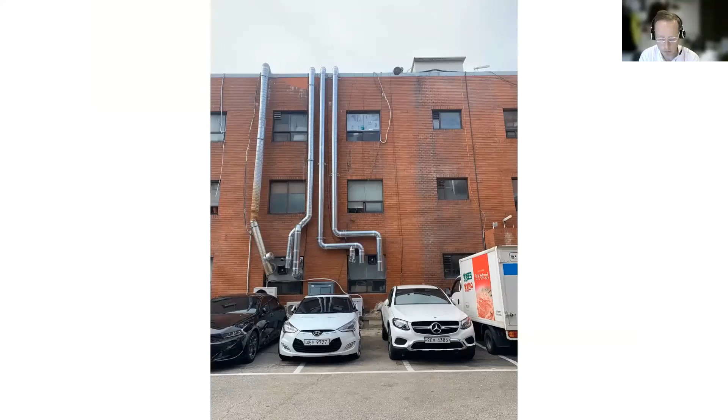We collaborated with some young architects from Seoul called PRAUD, who were looking at Seongsu, which is a district of Seoul which used to be an office district and now has been refit to become a kind of making space in the digital technology economy, using prosthetic additions to the urban environment such as these.

And we've also been undertaking a series of projects specifically looking at how food production might become a part of our cities. We launched this a few years ago with, and this will be close to home, a specific project looking at Hong Kong. And as you know, Hong Kong has one of the highest rates of food imports in the world. I think it's somewhere between 90 and 95% of the food that comes from internationally. So the question we've been asking ourselves is, what if all of our food is grown within the city limits?

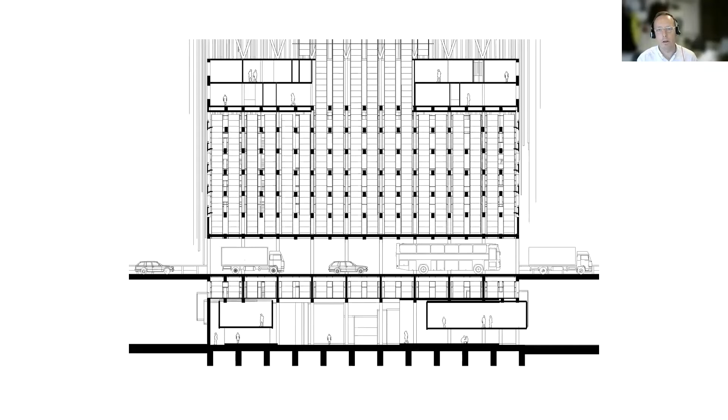In Hong Kong, we looked at this as an adaptive reuse exercise, particularly considering the density of the footprint. And we looked at this site in Kowloon, which I believe is now demolished, as a potential site that we could reuse and adapt. And so the scenario we set up for this was looking to the future when perhaps car parking has become redundant from the emergence of driverless cars. And we looked at the adaptation of this parking structure, which you guys probably would have known, to become the host to high density aeroponic growing systems.

Aeroponic growing, or aeroponic agriculture, uses less water, no pesticides, and is about 22 times more efficient than traditional agriculture, and can be packed together densely in interior environments, and largely requires no space to service it. And so what we worked out was, from that arrangement that I just showed you, this footprint could produce the equivalent of about 700,000 square meters of normal productive agricultural land.

And if we extend that to every car space in Hong Kong, it's the equivalent of this much agricultural land, which is roughly equivalent to about the amount of leafy greens that is consumed daily in Hong Kong.

And so I've got to finish up, but what that sort of sets up is a really interesting hypothesis or future vision of the city, where buildings and the urban environment are potentially not only for people, but a future in which we might need to consider how the productive components, and food production specifically, might be factored into the mix of buildings in our cities.

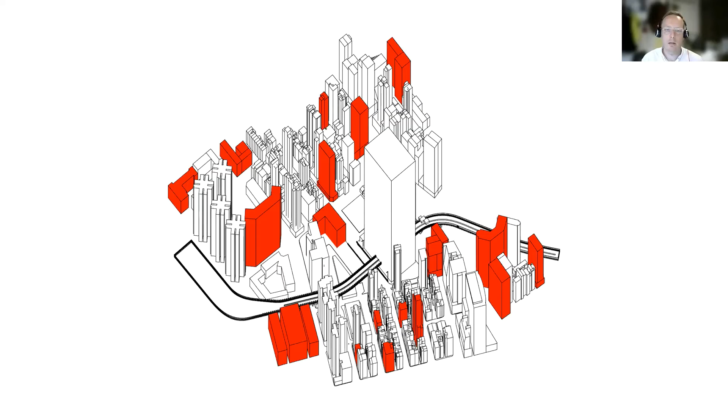And so really quickly, we looked at bringing that back to Melbourne, what that would mean at an urban scale and at an architectural typological scale. Melbourne has a very large ecological footprint, but because the city is so dispersed, as I said earlier, there is a greater potential for this to be re-injected back into the metropolitan boundary.

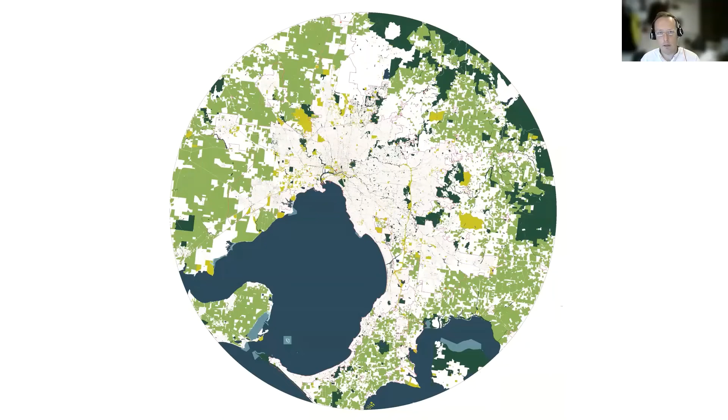And so using GIS, we did an analysis of existing agricultural, redundant car parking and brownfield sites in the city, and worked out that at a reasonable scale of density, it would be possible to accommodate all of the food production required for the city within a 120-kilometre radius, which is approximately an hour's drive.

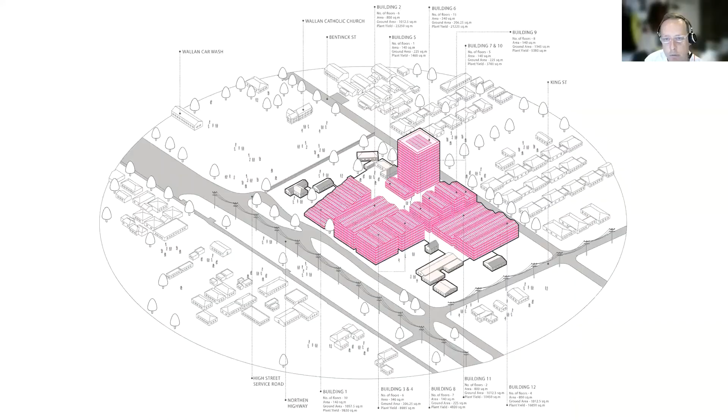Then we produced a series of test sites throughout that municipal boundary, looking at what it would mean at an architectural or urban precinct scale to begin to house these activities inside of buildings. We looked at that at an outer suburban site, at an inner urban brownfield industrial site that's been regenerated, and as the intensification of the urban periphery and an existing agricultural site.

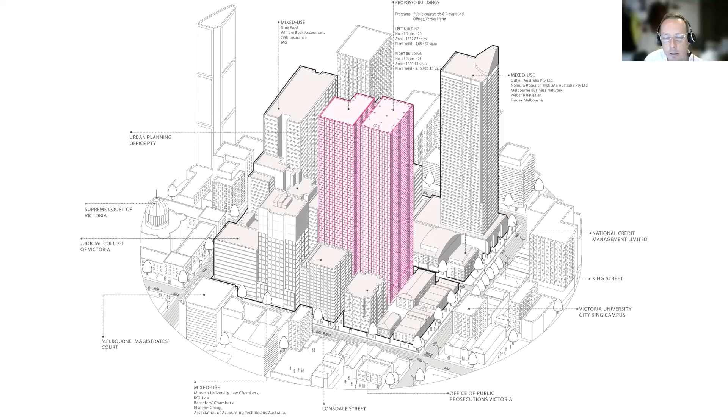And lastly, and probably most radically, we looked at the prospect of repurposing the envelopes of our high density city to become a space that is productive and in support of the consumptive landscape of Melbourne.